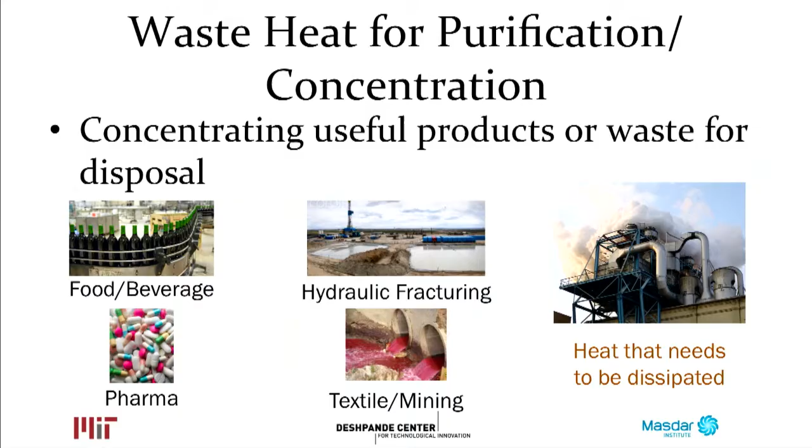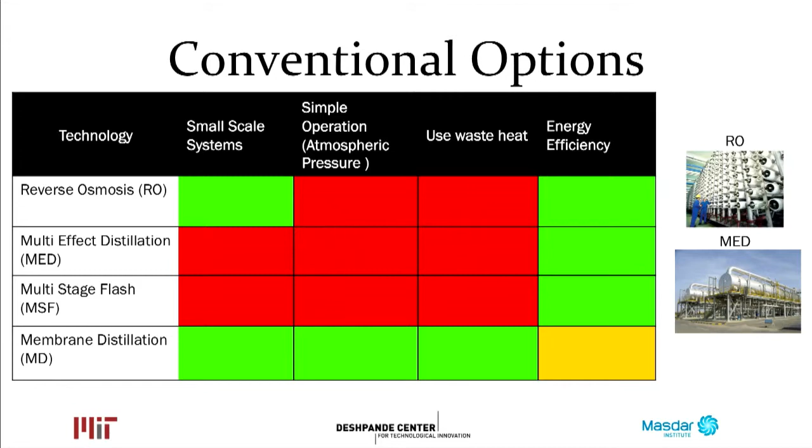So a theme of this talk is to focus on whether we can use waste heat to effect some of these separation processes. We've decided to focus on membrane distillation to do this because it can use low temperature waste heat sources, and also because it's modular and can operate at several system sizes. Unlike some of the other technologies such as reverse osmosis or multi-effect distillation systems, it operates at atmospheric pressures and does not require high vacuum or high pressure pumps. Therefore, it has a simple design.

But one problem with the existing membrane distillation modules is that the energy efficiency is not as high as the conventional technologies in this field. Our innovation bridges this gap in terms of energy efficiency and makes membrane distillation really competitive for these applications.

So how does the process work? Membrane distillation is basically distillation through a hydrophobic membrane. Unlike normal distillation, you don't have boiling and condensation. Instead, you have evaporation and condensation. This means your process stream can only be 40 to 80 degrees Celsius, much lower than the boiling point at ambient pressures. You have a hydrophobic membrane that prevents liquid water from passing through, but allows vapor to pass through.

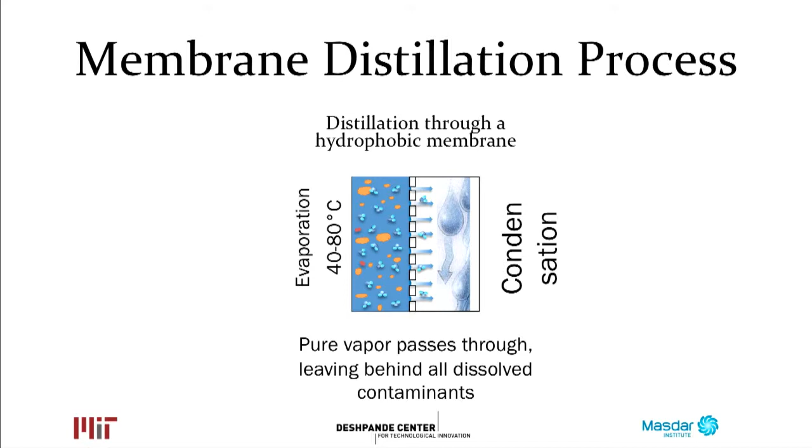A contaminated stream is heated, and as it flows through, the vapor passes through, and it can condense on the other side as a pure stream. The membrane manages to make the system extremely compact, with the evaporation and condensation happening within a few micrometers of each other. This membrane would be put into a system along with a condensing surface to enable heat recovery.

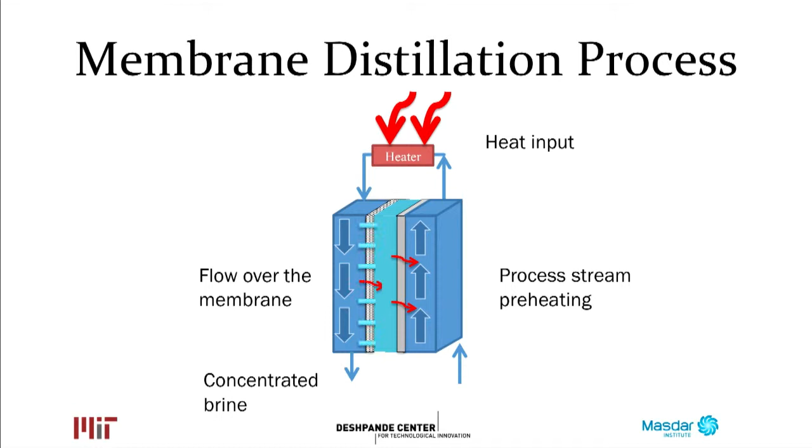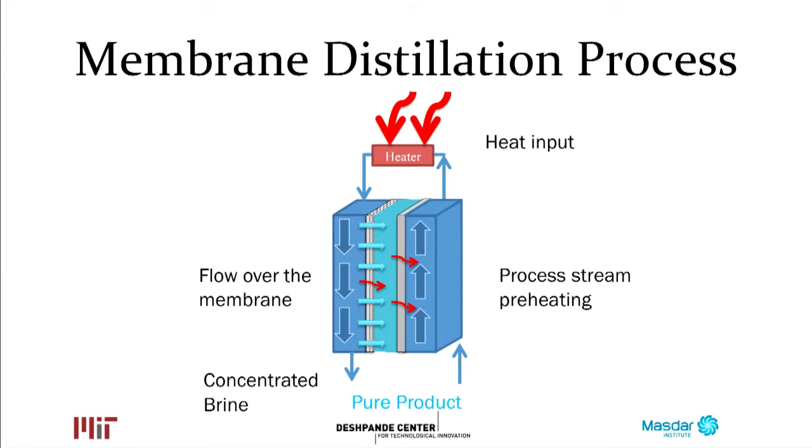So I'll go through the process schematic here. The process stream would enter on the right across a condensing surface. The condensation energy is transmitted into the stream, thereby preheating it, before it goes through a top heater where further energy is added. Finally, this stream would then flow on the left over a membrane. As it flows, vapor of the solvent leaves, and then the stream becomes a concentrated, cooler brine that can be disposed. And this condenses in the gap between the membrane and the condensing surface and is recovered as product.

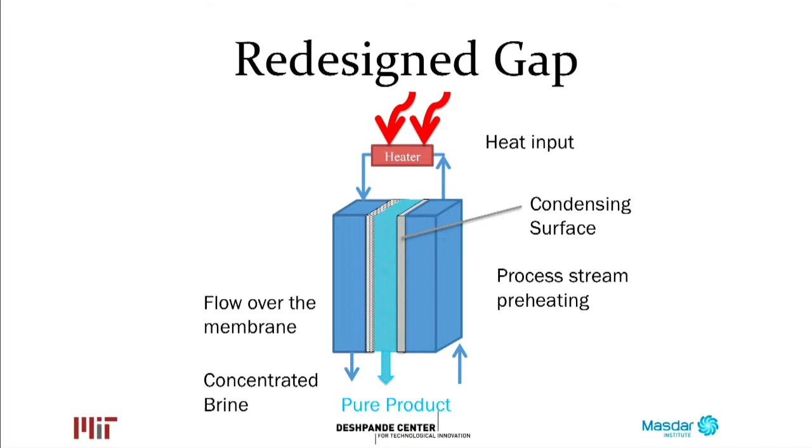The way we've managed to improve this technology is by having models that predict the bottleneck. Conventional wisdom was that the gap needs to be insulating enough to prevent losses. But then we realized that going against this conventional wisdom, by adding materials in the gap to increase the conductivity, we can improve the overall heat regeneration and improve the energy efficiency as well as flux.

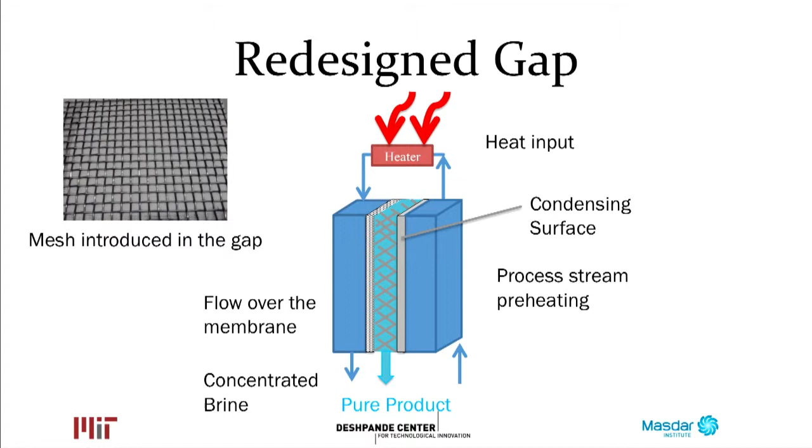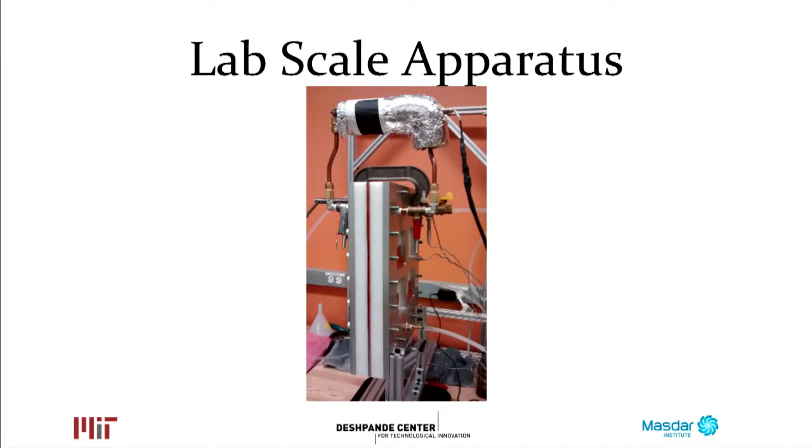Using funding from the Deshpande Center grant, we've set up a foot-by-foot experimental setup in the lab. I'll be discussing some of the results. The setup performs exactly similar to the module shown before. We have fluid entering on the right side, going through a heater, going to the left side where it becomes concentrated brine. So what are the results?

So these results have been published in an International Desalination Association conference, and we've also patented as well as submitted several drafts to the TLO at MIT.

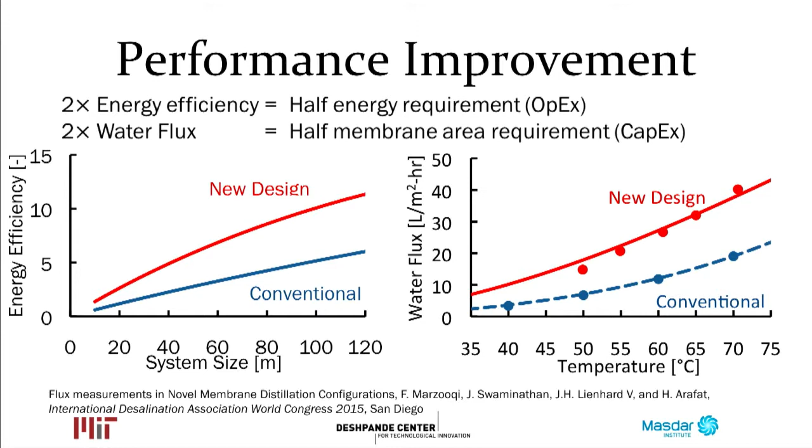So how would all of this come together in a real system? Let's take the example of hydraulic fracturing. Oil wells are sparsely located over a geographic area, and each of these wells would produce brine that needs to be disposed, but can also be stored on site for a while. The conventional method here would be to truck out all this water into a common treatment facility or truck it out directly to disposal.

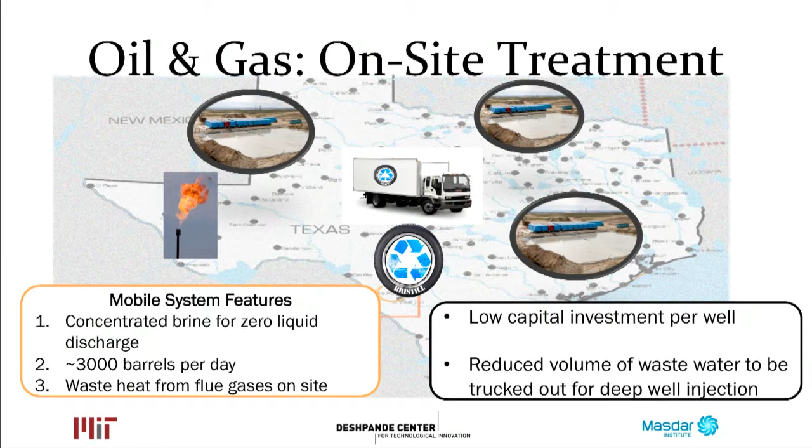By having a system that is tunable in terms of reducing the capital as well as the system size required, we can fit a membrane distillation module into a mobile truck that can go to each of these wells and enable on-site waste regeneration as well as reducing the volume of waste. So in effect, we'll be having a lower capital investment per well because one system can handle water from all of these different wells, as well as reduce the volume of waste that needs to be trucked out by up to 50 or 70%.

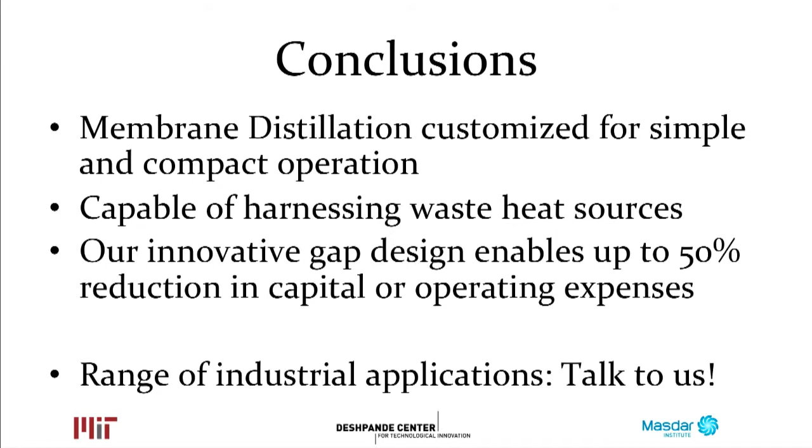In conclusion, the membrane distillation system is customized for simple and compact operation at ambient pressures, producing purer waters and managing to use saltier brines. We are capable of harnessing waste heat sources. For example, at the oil well, there are gases that are burnt that are not used. We can use those sources. And our innovative design enables reduction in either capital or operating expenditure or any combination thereof.

And we are really excited about a wide range of applications for this technology and are looking forward to talking to you about it over the poster session.